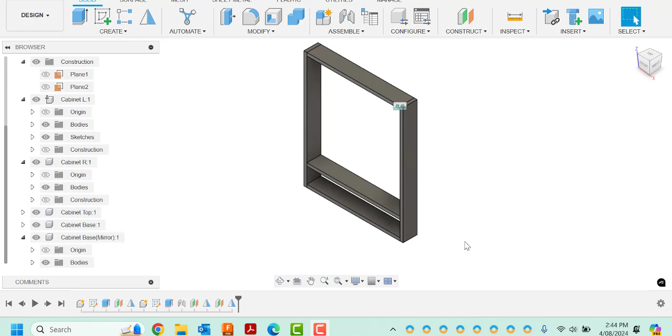All right, the next part we need to do here is create our doors. So there are some drawings here, roughly what we're looking at when it comes to our doors. Now they are 750 by 320, and the width of this material is 70 millimeters wide. So it's 70 by 19 by the length that we've got written here.

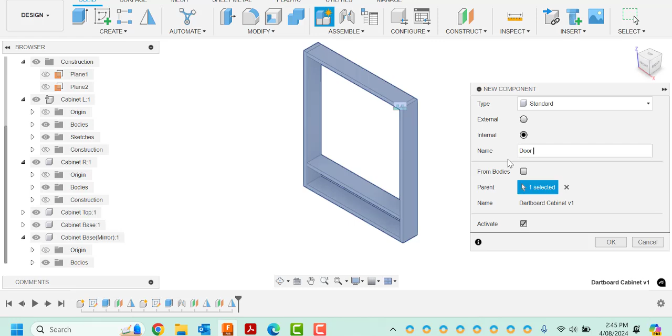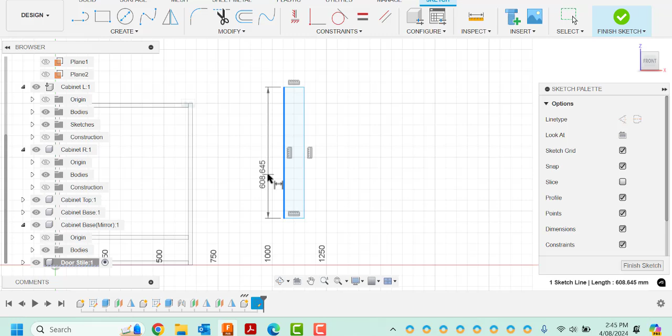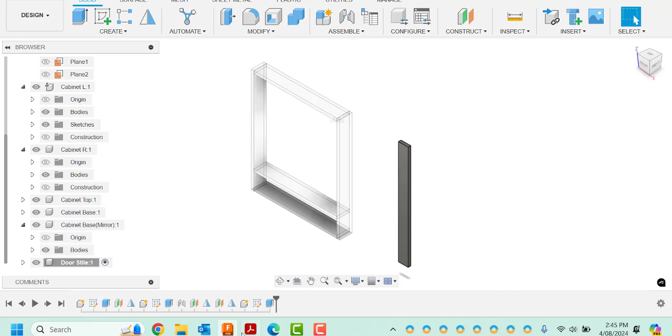So if we look at our door drawing that we have here, it says 307. It's actually going to be 320, and then we're going to minus 140 from that, which leaves us a number of 180. So that middle section there is 180, and therefore the midpoint is going to be 90.

Just a recap of that: 320 wide, 70 mil here, 70 millimeters there, which will be 320 minus the 140. That leaves us with 180 millimeters, and we want the middle section of that to be 90.

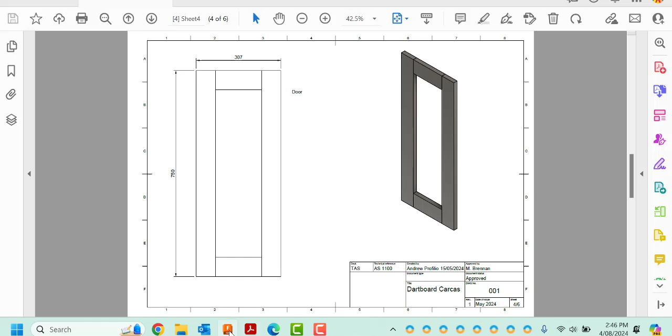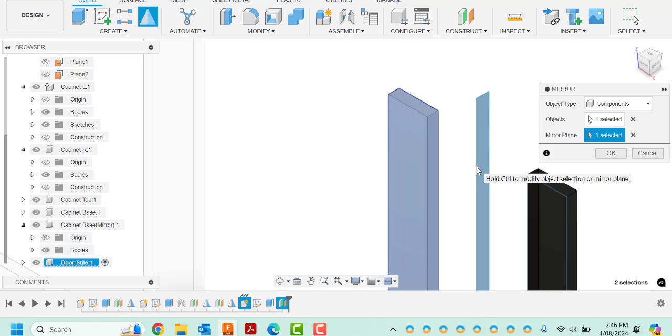So we come across to Fusion. We're going to construct our offset plane, zoom in, click on that face, and make it 90. We're going to get our mirror, which is from create and then mirror. The component is our upright, the mirrored plane is that section there, and we'll press enter.

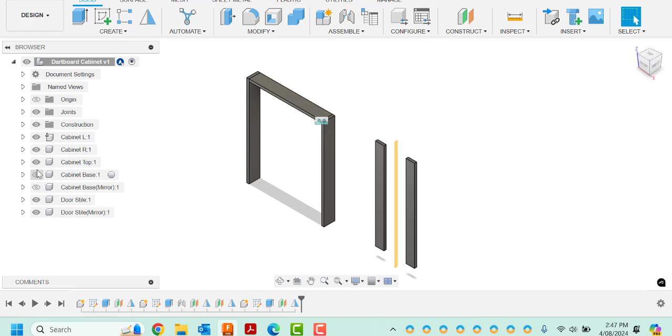Show me a picture of the entire cabinet. We go back up at the top here. Now, if you've opened up all these, they're called the tree. We can press these little triangles and it'll make it all nice and short. If seeing that cabinet gets a bit confusing for you, press the picture of the eye, and we can effectively make it all invisible, so we're only looking at one part of our project.

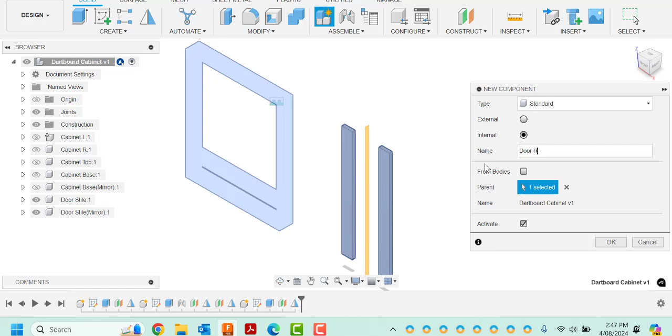So we have our two door uprights. Now what we're going to look at doing is creating a new component, and this is called the door rails. So we say OK, and we're going to create a front view.

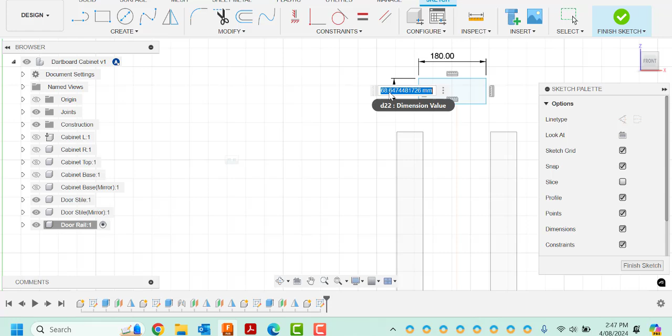And then enter. Now if we do our calculations here, our door is 750 millimeters long. We're going to minus 140, that brings us down to 610, and if we divide that by 2, we're at 305.

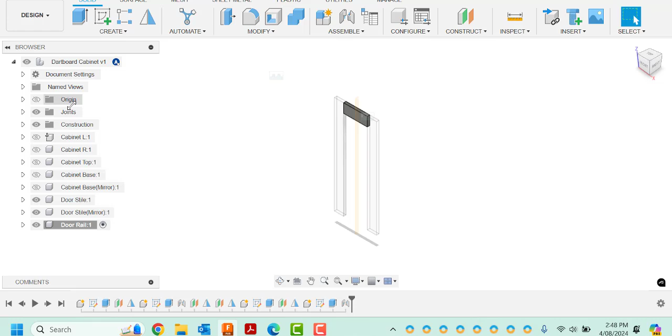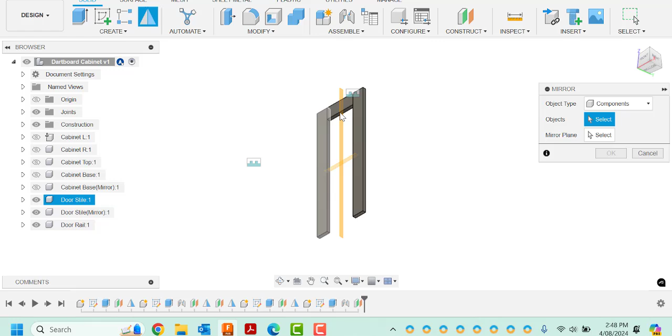So if we press that circle—actually we won't press that circle, we'll just press all, so it's going to turn everything back on. We're going to construct an offset plane. We want to see the underside down here. We're at that, we're going to go to 305. If we zoom out and mirror, press that, the mirrored plane is that section right there. We press enter, and now we've got our entire door.

So for that, we'll go Windows Shift S, pick up our name again, screenshot that, and paste that into our drawing.